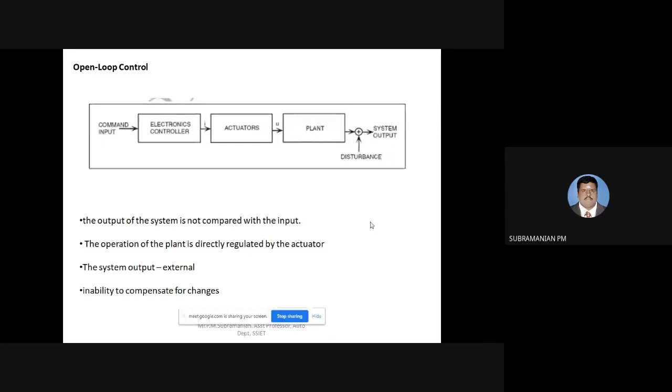If you're having any doubts, you can ask me. Please unmute the call and inform me whether you have understood or not. Anyone? Is anyone listening? Hello?

So in this unit, the same thing: I am getting an input. I'll be having a controller, that is control electronics or electronic controller. It will be sending a control signal, an electric signal, to the actuator. From the actuator, I'll be getting a delivered force, displacement, whatever it may be, to a plant, that is the system I'm going to control. So from the plant, I will be getting the output.

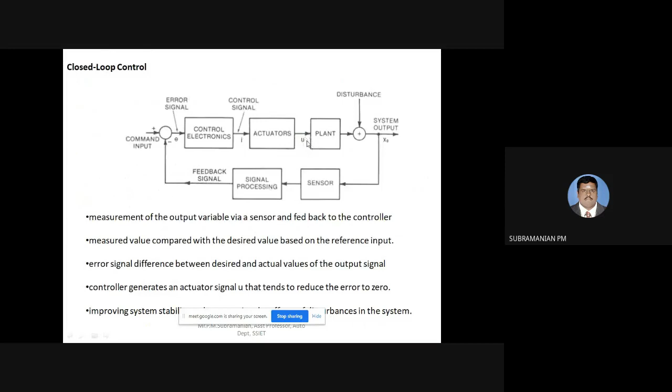There is a value called the manipulated value. I have shown you U, which is given by the actuator. For a PID controller, my U will take a value that is MV, the manipulated value, which will be the summation of the three terms: proportional, integral, and derivative.

Already I have told you KP is a gain, so I can use other words: a weight, a weighting factor, or a tuning parameter. KP can be termed a tuning parameter, KI can be termed an integral gain tuning parameter. So all of KP, KI, and KD can be termed as gains, or tuning parameters.

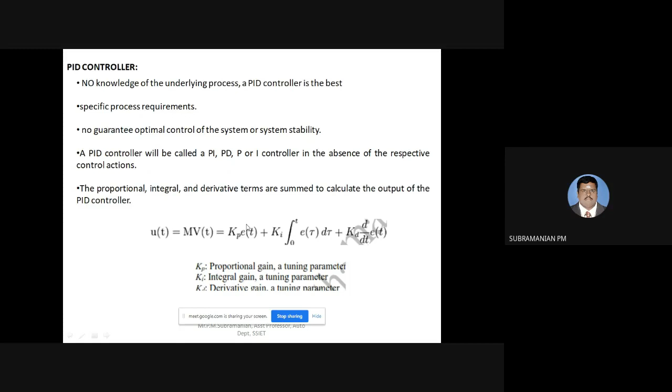A high proportional gain comes into play when there is a large change in output. Due to any disturbances, there will be a change in output, and the change in output will be more. So due to that, I will be increasing my proportional gain, making its value high. What will happen due to this is the system can become unstable. I can't assure that the system will be stable because I have increased my proportional gain to a high value.

The system can become unstable. Whereas when I decrease this value, say a small gain for the output, I can say the system is less responsive, and I can classify the controller as a less sensitive controller. So based on the value of the proportional gain, I can say whether the system is unstable or less responsive. If the proportional gain value is high, I classify the system as unstable. If the proportional gain value is less, I classify it as less responsive or a less sensitive controller.

Next, there is a defect in the proportional controller, that is the P controller. I'm using the word proportional term, meaning P controller, instead of PID I'm using the word P controller. What will happen now is there is an error called droop. Droop is defined as process gain divided by proportional gain.

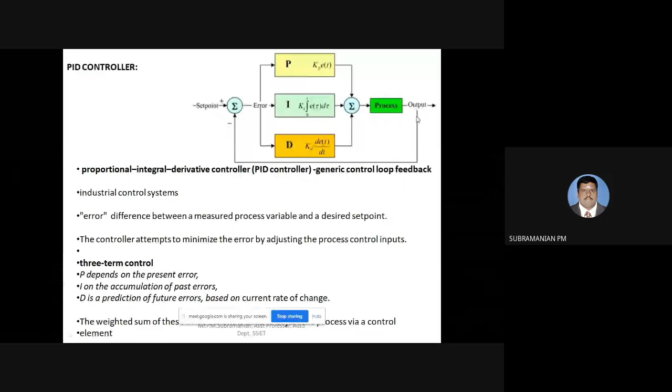Why does this droop come? When you have a setpoint, that is a target value, when you are doing an optimization process, when you are controlling a system, you will be having a value, say the value should be 5. But due to this proportional gain, the value can go below that. So drooping takes place - whenever it does not settle at the target value and goes below it, that is known as drooping.

This is like what you might have studied in engineering materials, that is annealing - you will be cooling the metal component in a furnace. Sometimes it will cool below the desired temperature. That type of error can be termed as droop. So going to a value below the desired value can be termed as droop.

So droop can be defined as directly proportional to process gain and inversely proportional to proportional gain. Process gain means due to that process, I will be doing some work. That process gain is directly proportional - that is, if the process gain increases, my error will increase. So how to counteract this error is I can increase my Kp so that I can reduce my error. So for purely proportional control, droop is the peculiar defect.

When I go for a P controller, the major drawback is that droop can occur. So the droop has to be compensated. That is, instead of going for a purely proportional control, I have to add an integral term - I can go for a PI controller instead of a P controller to address this droop.

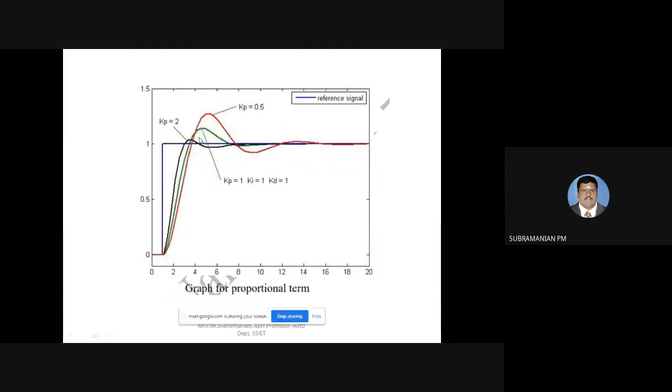Next we'll be discussing about the integral term. If you're having any doubts, shall we proceed to the integral term? If you're having any doubts, you can ask a question.

Please unmute and answer, whether you are in the class or not. Dinesh Khanna, Karthik, Manikandan, Sathish Dinagaran. Hello. Hello, unmute and answer, are you able to listen or not? Hello Preeti, are you able to listen? Unmute the call and answer. Yes sir. See, you have to stay in the line, okay? Whenever I am asking any question, you have to answer. Okay, okay sir.

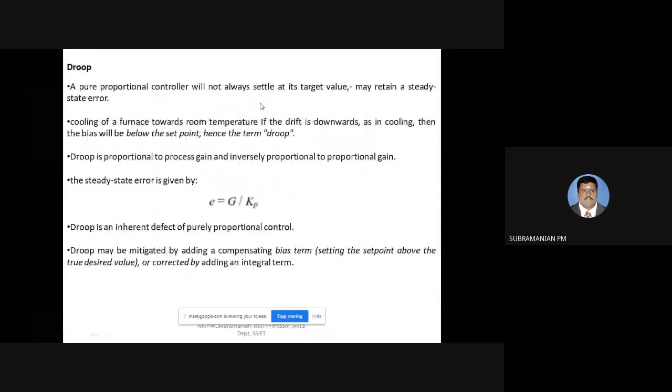Next we'll be discussing about the integral term. Previously we discussed proportional, now we'll be discussing the integral term. In proportional, they concentrate on the magnitude of the error, whereas integral takes into account both magnitude as well as duration. So my integral term will take the magnitude as well as the duration.

How the duration is taken into account: you can see the integral is related to 0 to t. I am calculating the error for the past period, considering the duration of the error, when the error started and till present. What is the error? I am going to sum up the error values. So the integral term is a sum of instantaneous error over time.

By this integral term, I will be modifying my input so that the output moves towards the set point. By providing this integral term, I can make my control system control the plant so that it gives an output moving towards the set point, eliminating the error. So the basic drawback is sometimes overshoot will happen. In the previous term, proportional, undershoot or drooping takes place, whereas in integral, overshoot takes place.

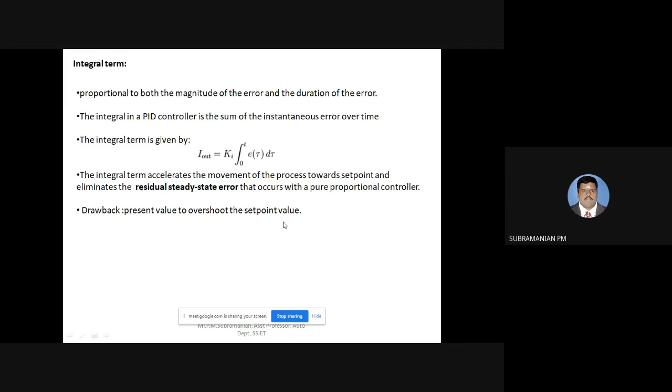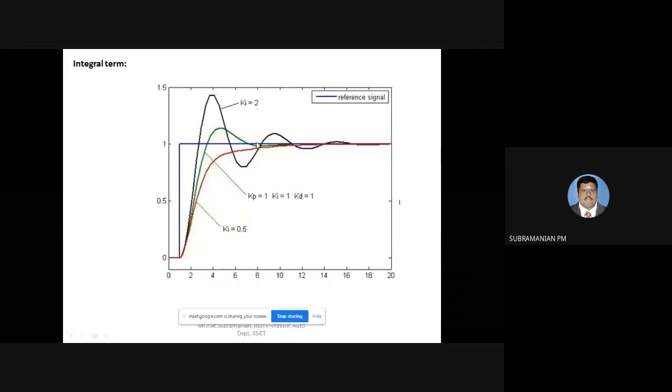You can see here the one graph is the same, that is KP 1, KI 1, KD 1 having a green color sketch. If I go for a higher KI value, you can see the problem is overshoot, going above the reference signal. When it is 0.5, it is less than the reference signal and matches the reference signal after a particular time. So I have to take this gain to a proper value to match the reference signal within the minimum period of time.

Next we are going to discuss the derivative term. The derivative term, you can see this expression: differential of error with respect to time. If you plot a graph of error versus time, I'll get a slope. I am going to multiply this slope with my gain, that is the derivative gain, multiplying this rate of change of error with respect to time with the derivative gain. That is what we can say, in a PID controller, the D or derivative output.

So what this is going to do: by using this derivative term, the rate of change of output will be reduced. Previously, overshoot happens, whereas here, due to this term, I consider the rate of change of error with respect to time and multiply this term by a gain. So by adding this term to my input, I can control my output, that is the rate of change of output. It will control the rate of change of output, so overshoot will not take place.

So the main advantage of this derivative term is overshoot will not take place. It will reduce the magnitude of the overshoot. So that derivative term will ensure process stability. And the main problem of the derivative term is when any external disturbance happens, any noise or disturbance coming from outside, the system will become unstable. It can't respond to outside problems. So that will be the major drawback of this derivative control term.

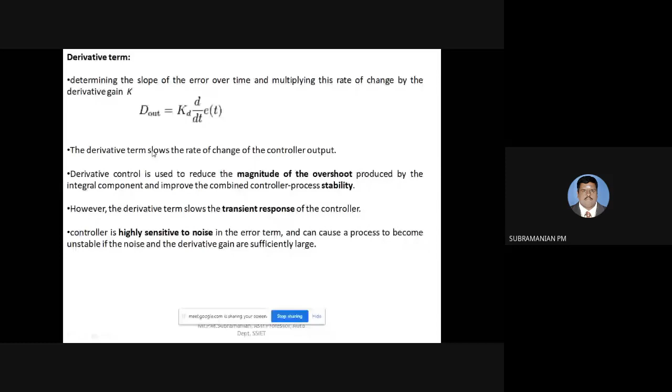There is a derivative controller, the PID controller derivative term D alone. You can see here, KP 1, same graph, KD 0.5, KD 2 - you can see it will be meeting the reference signal after a particular time.

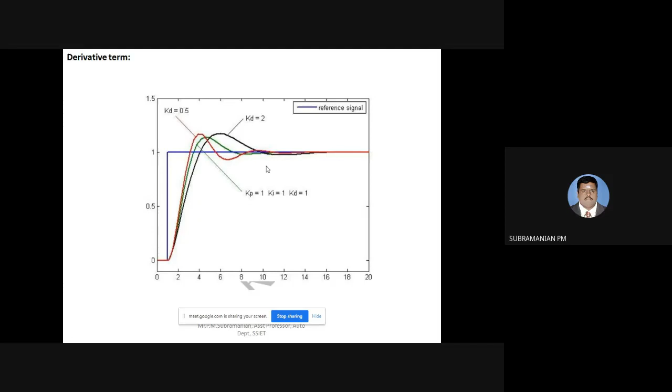Next, we will be discussing the lookup table. That is the next topic in our syllabus. Shall we start?

Okay, we'll be starting this lookup table. What is this lookup table? It is like an array, where I'll be having a relationship between two variables, and that relationship will be stored in the computer memory. So whenever I want to find a value, I will refer to that table, that is the lookup table, and based on that, I will find the required value. That is a lookup table.

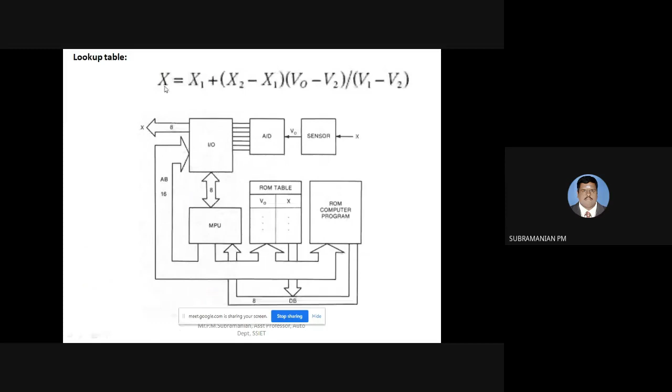Next, I will be discussing about Fuzzy Logic. Any doubts in lookup table? If you want to ask anything, you can ask.

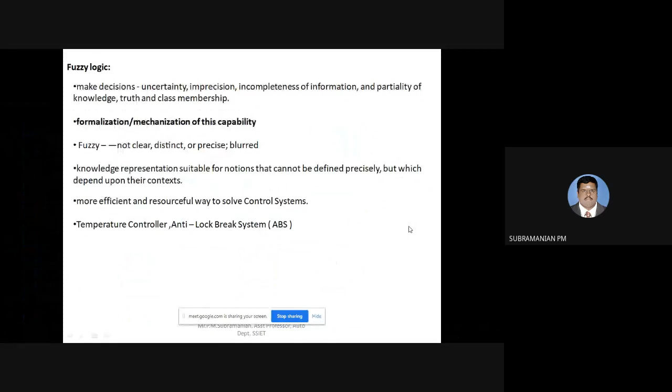Shall we proceed to Fuzzy Logic? Manikandan, Dinesh Khanna, are you listening? Unmute the call and give the answer. What about Pranay, Sai? Satish there? Satish, is there in the line? Preeti, unmute the call.

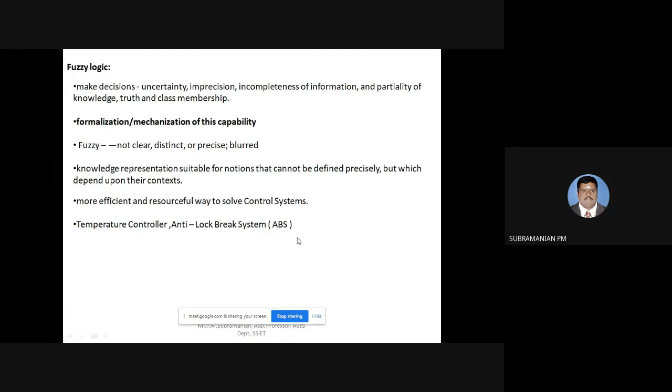That decision will be taken by the Fuzzy Logic technique. I will not be having complete information, but whatever information I'm having, I can make a decision so that I can prevent wheel lock. So this will be the representation of Fuzzy Logic.

So already I have told you, in ABS we are working based on Fuzzy Logic. It will be monitoring the braking system on the vehicle, and it will release the brake just before the vehicle wheel locks. So the main thing is at what time, what is the best time to release the brake - it will be decided by Fuzzy Logic.

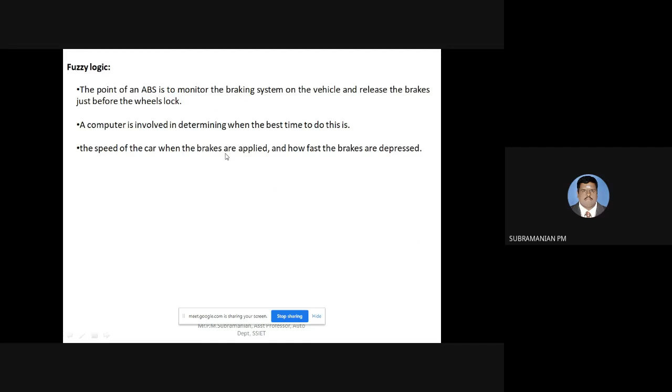Next we are going to discuss about adaptive control. What do you mean by adaptive control?

Adaptive control means I am having one control system. I will be formulating one control law. I will have maximum values, a positive maximum value and a negative value. When everything happens within this limit, my control system will be working. That system can be classified as robust control when it operates within that limit. It can't change the control law, so I will design the control system to operate within that control law.

It will have predefined limits, and it will operate within those predefined limits. When the limits change, the control system will not be able to deliver properly. It will not be effective. It will not be adaptive to the change. That type of control system is known as robust control. The control law is fixed, I can't change it.

Whereas in adaptive control, what I can do is if the limits are going to change for the problem, I will be feeding one law into the control system, but the limits are not fixed to that law. The limits are changed, so I have to be adaptive to the change. I have to modify the control law for the change. That type of control is known as adaptive control.

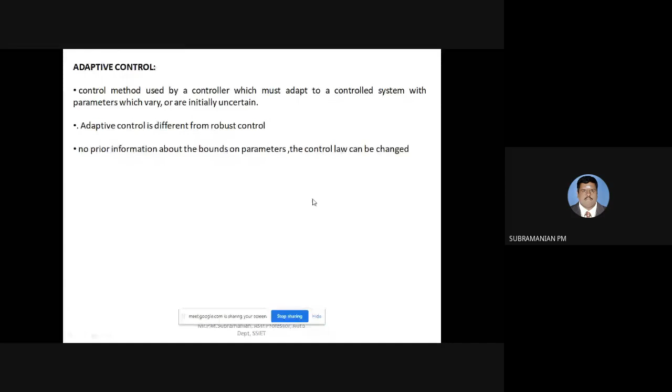In our automotive field we have an adaptive control system called adaptive cruise control, ACC. If the ACC is fitted in the vehicle being driven, and the vehicle in front is traveling, what the ACC will do is automatically decelerate the vehicle.

It will be decelerating the vehicle, but sometimes it can apply the brakes also to avoid collision, so that a safe distance is maintained between the vehicle traveling in front and the ACC fitted vehicle. A safe distance will be maintained, and I will ensure that collision will not take place. That is adaptive cruising control.

So in that, the different control units I have include engine management control. Engine management control lets me control the acceleration of the vehicle. If I want to decelerate, there are different ways - one is from the engine perspective, I will close the throttle opening so that the amount of charge entering is reduced. My engine speed decreases and vehicle speed also decreases. That is from the engine perspective.

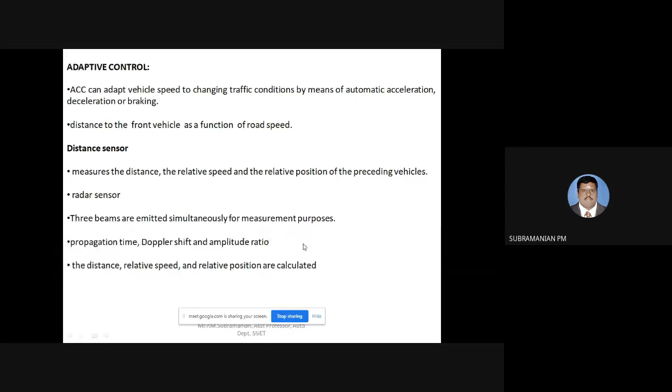There is another system called ESP, electronic stability program. In order to maintain vehicle stability, I get input from different sensors: the yaw rate sensor (yaw means angular movement about the z-axis), then input from steering wheel angle, wheel speed, and lateral acceleration. From all these parameters, I get the input, and the ECU regulates the braking.

Other inputs include video imaging. As I told you, video imaging and navigation systems give the input of the preceding vehicle, and radar signals also give traffic flow information.

As I told you, there will be intervention from the engine side and the brake side. In this ACC, I use an engine that is not a conventional engine, but an electronic engine power control system, that is, I control my engine electronically. Only then can I use it in my ACC.

So how to achieve this? When the vehicle has to be accelerated to the desired speed, I use throttle opening. By increasing the throttle opening, I can accelerate; by closing the throttle opening, I can decelerate. Whether I require acceleration or deceleration, my electronic engine gets the input and based on that decides the throttle opening.

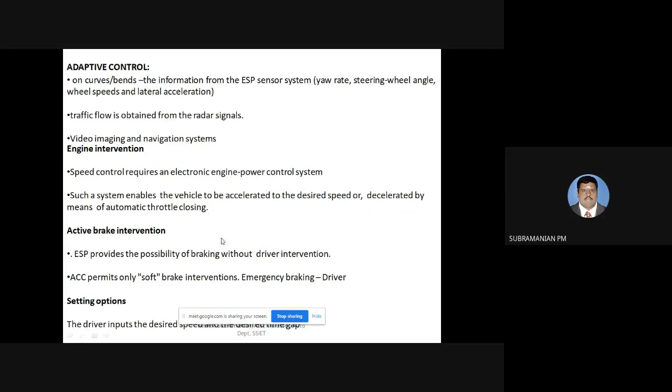So the input is the driver inputs the desired speed and the gap.

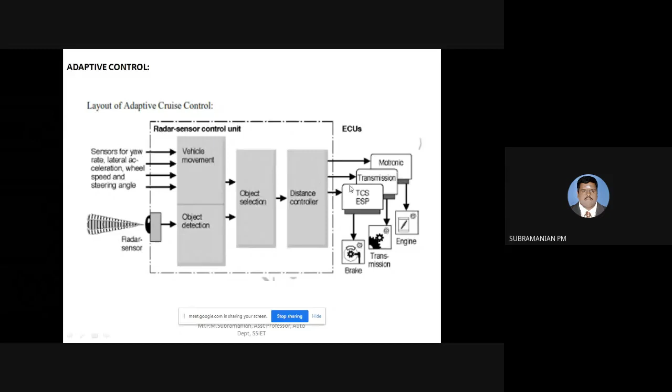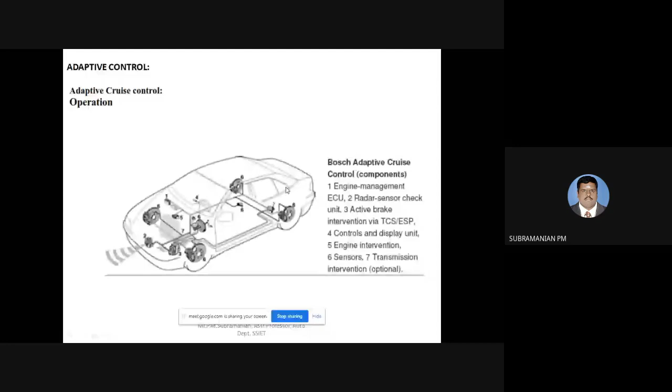You should be able to draw this sketch. Then this is not required. You can write this, but simply you can show this beam, and this can be simplified. If you want, you can draw it, otherwise this is the main sketch you have to draw here.

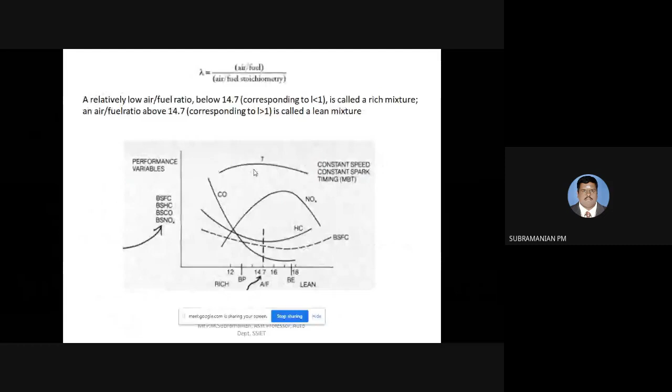Next thing, parameters to be controlled in SI and CI engine, this is the last topic in Unit 1. We will be seeing it in the next class, and in the next class I will be starting Unit 2. So today I have completed Unit 1, only one topic is remaining, so next class we will be seeing the second unit.